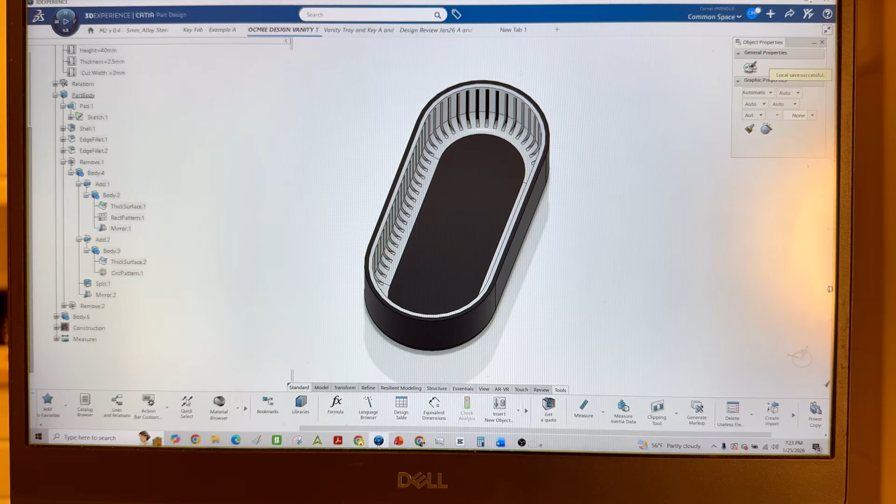In this video, I modeled a vanity tray inspired by the Rivian headlamps, the famous oval stadium shape. That is a strong, clean geometry, and it will work very well as a vanity interior storage piece.

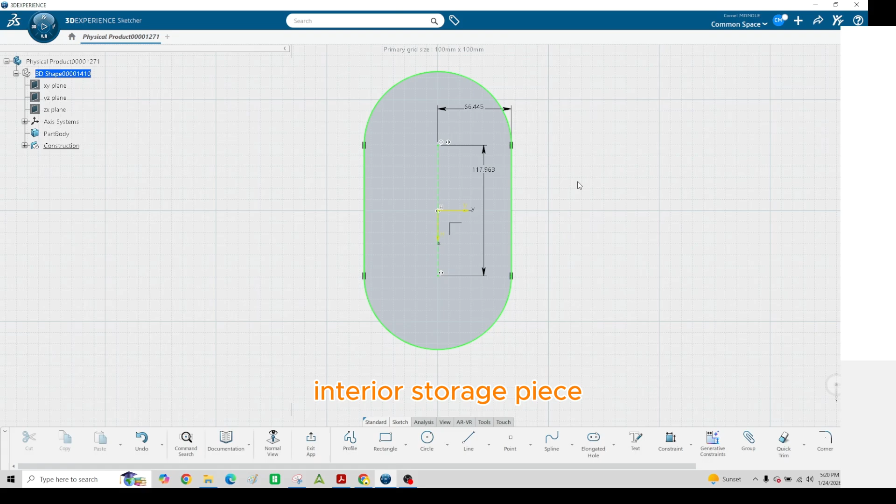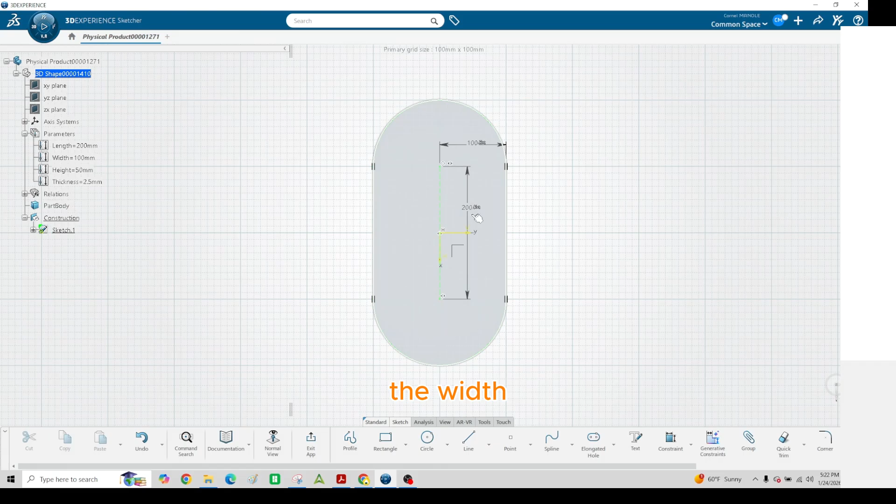I started from the base and built a model using Part Design, keeping everything fully parametric and production oriented. I've created a few key parameters like the length, the width, the height, and the wall thickness for this piece. And using Sketch, I've constrained all the dimensions using these parameters.

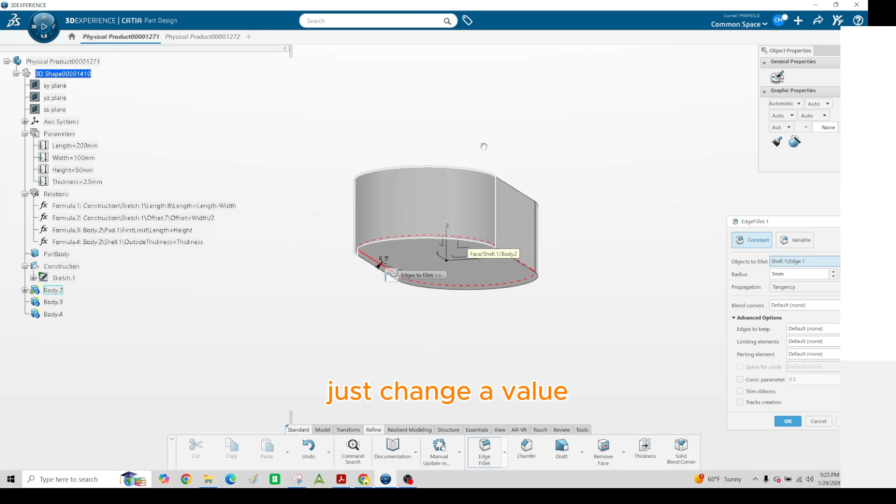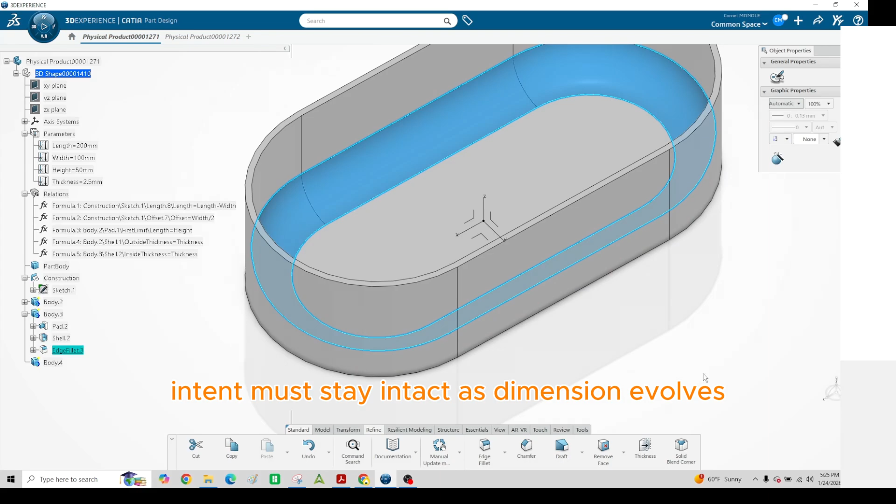So in future, when I want to alter the shape, I will just change a value and the entire model will update quickly. This will allow me to explore multiple variants very quickly. I can generate dozens of proportions without rebuilding the model. It's the same logic I use on production parts where design intent must stay intact as dimensioning evolves.

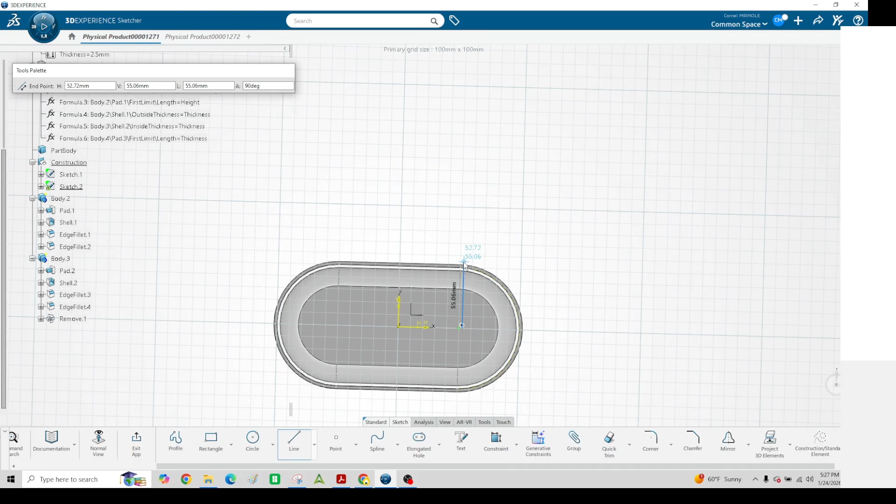As you can see, I already created the outer body by extruding the main sketch as a pad and applying an outside shell. Now I've worked on the inner geometry, where I apply the same logic, extruded pad, inner shell this time. And for the bottom, I've used a remove Boolean command to have an open bottom.

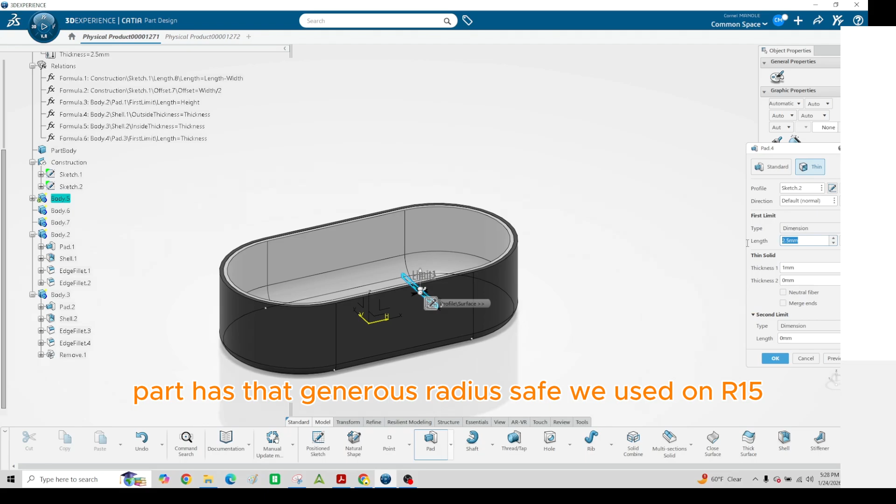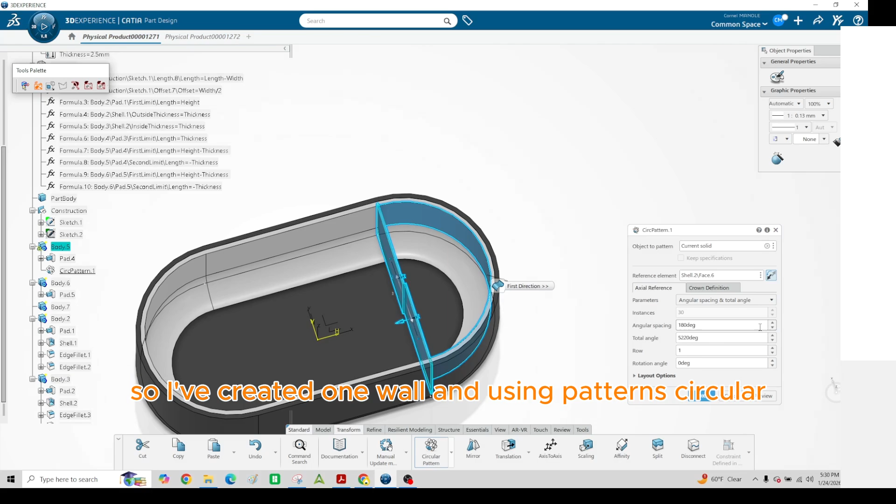Of course, the shape of this part has that generous radius. I've used an R15. And for the inner part, one of the characteristics are those openings. So I've created one wall and using patterns, circular patterns and rectangular patterns, I will create half of the geometry. And after that, I'm using a mirror command to obtain the rest.

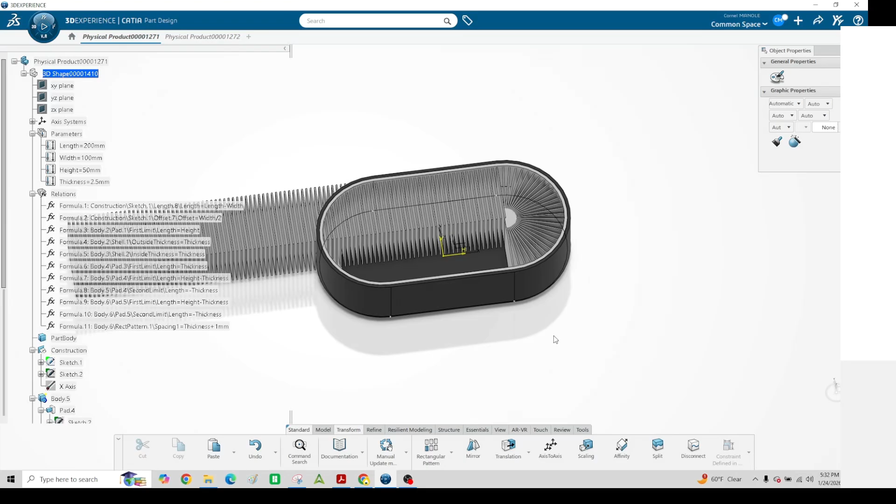Of course, I will use a Boolean remove command to subtract this pattern body. And the result will be a clean, consistent set of openings that gives the part its character without compromising the structure.

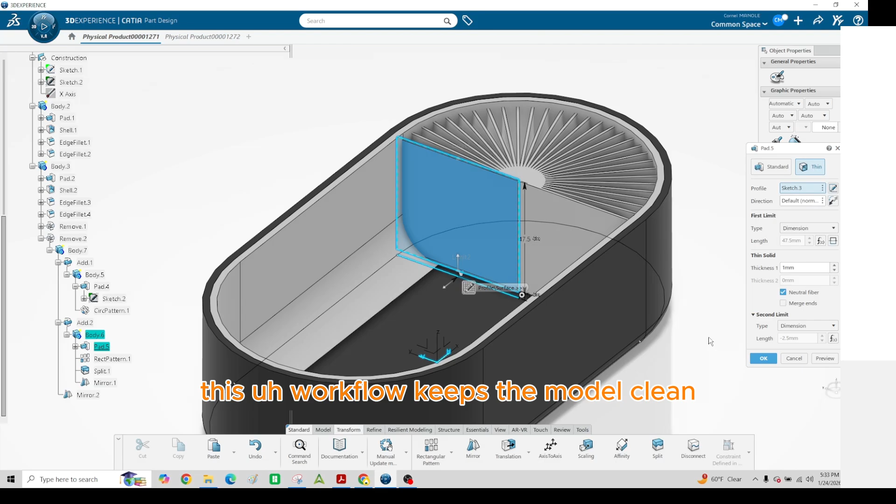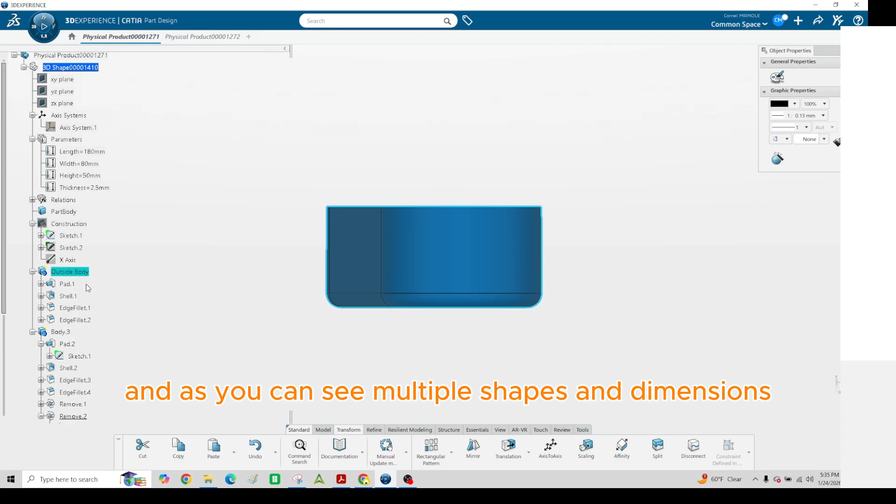This workflow keeps the model clean, parametric, and easy to evolve. If I want to change the wall thickness, the height, or the spacing, I can do it by modifying those values that I set up in the beginning. And as you can see, multiple shapes and dimensions will be possible to explore in seconds.